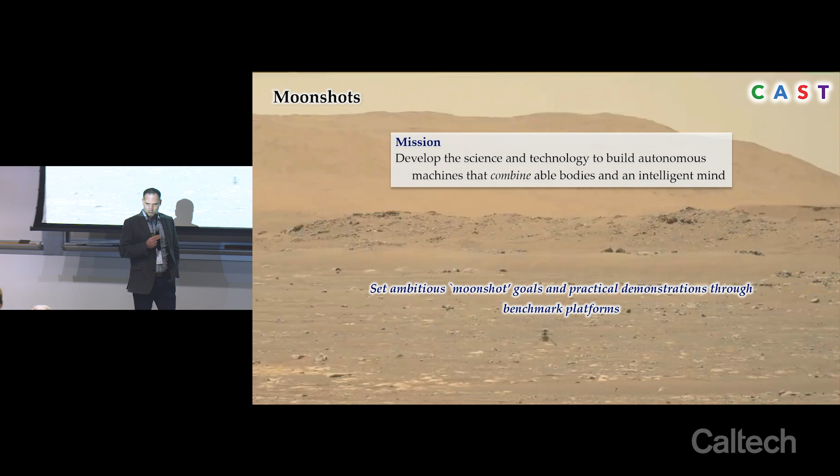So to kick off, I'm going to rehash a couple of Mory's slides just to connect back up again. The ultimate idea was to bring together bodies and minds and do this through ambitious moonshots. This is more of a Mars shot, which is the way I like to think about them now - let's get things on Mars as well as the moon, as JPL indicated earlier. But how do we set these kind of seemingly crazy goals and then push the science to actually make them a reality? As you saw earlier, CAST started with this collection of moonshots, and these have really stood the test of time over the last 6 years.

They represent all the different ways you can imagine robots interacting with people - through partners, through the environment, through things like explorers, but also the ways they can help us through things like guardians. Wildfires were mentioned earlier - how can we have robots that serve as guardians? And so we've developed in each of these moonshots over the years.

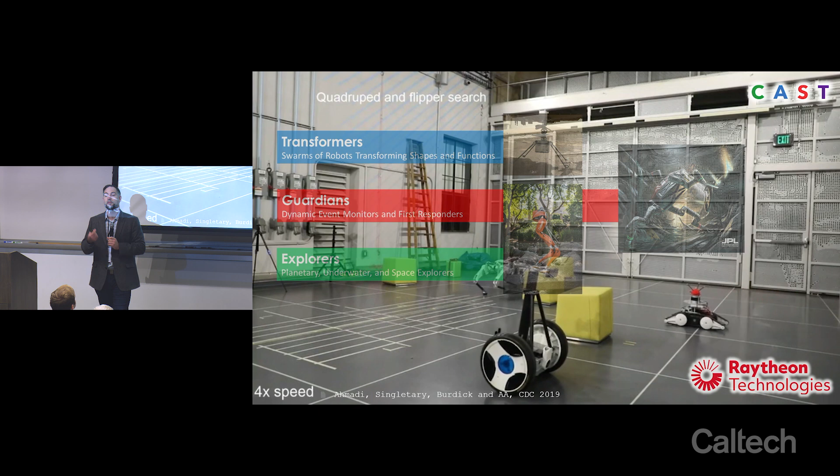But something interesting has happened recently, and I think this marks the next stage of CAST, which is it's not just the individual moonshots now, but we've started to think beyond the moonshots and how we can unify between multiple moonshots simultaneously, now that we have this sort of baseline capability. This was one example - with the Raytheon project, where we brought together these moonshots, if you'd like.

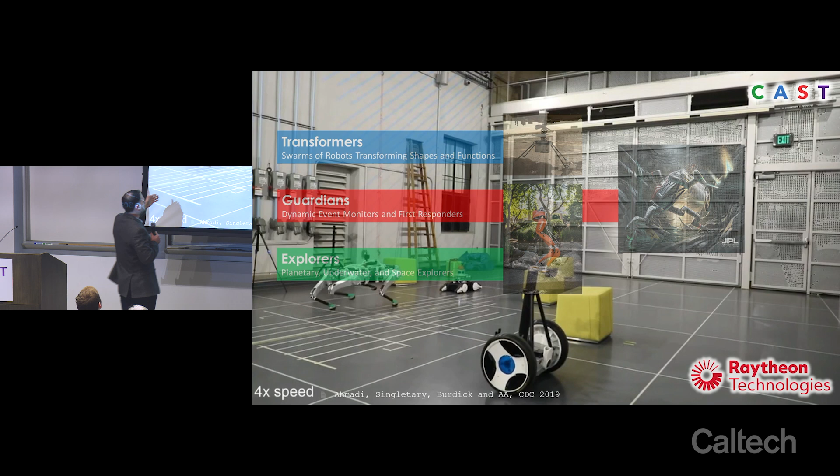So it's sort of transformers in the sense that we have multiple robots here with different locomotion modalities, and they're able to work together and coordinate autonomously to explore a space. So what you can do is utilize, if there's rough terrain, you can use the quadruped. If you need something a little bit rough, you have tracks, and then finally you have a wheeled vehicle that might have most of the equipment on it. So how do we pull those together in the transformer context to explore a new space?

And so this is this multimodal locomotion paradigm that JPL is thinking about for the moon right now. This is, when I talk about combining moonshots, I think a wonderful example. This is not my work, and Alireza will talk about this in this session. So I'm just highlighting really quick this idea of bringing together multiple moonshots.

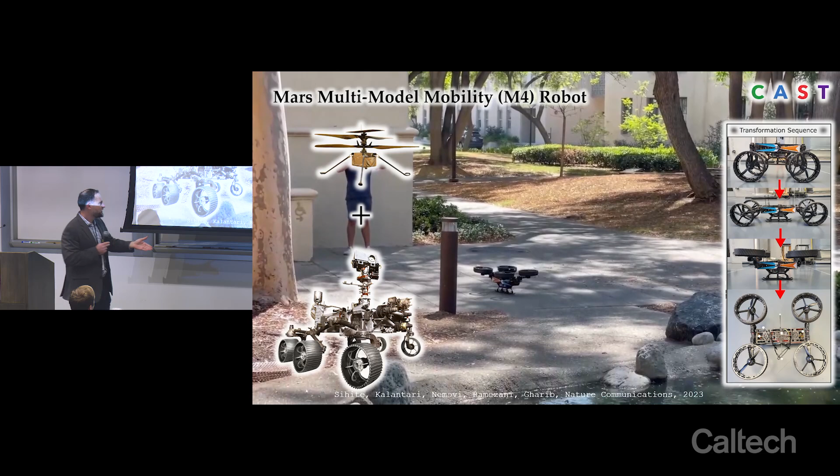In this case, you have a transformer, and it was directly motivated - this is not my work, but I heard it's directly motivated by thinking about combining the Mars helicopter with the Mars rover. Now you have a platform that can both fly and drive and transform between those modalities, so it can explore new and novel spaces by leveraging multiple modes of locomotion.

So this leads to where we're going next in my mind, which is how do we really bring together a bunch of different robots and fully leverage their capabilities? As an example, this is one of our more recent moonshots that we're just kicking off, and it's a result of TII.

We want to think about a robot that might be able to do more than just fly and drive, but also walk. Now these are just mock-ups, an illustration of what this robot might look like, but these are more than just mock-ups—we've started to work on different components of this. The moonshot here is: how do we do this? Just at a basic level, what is the mechanical design needed?

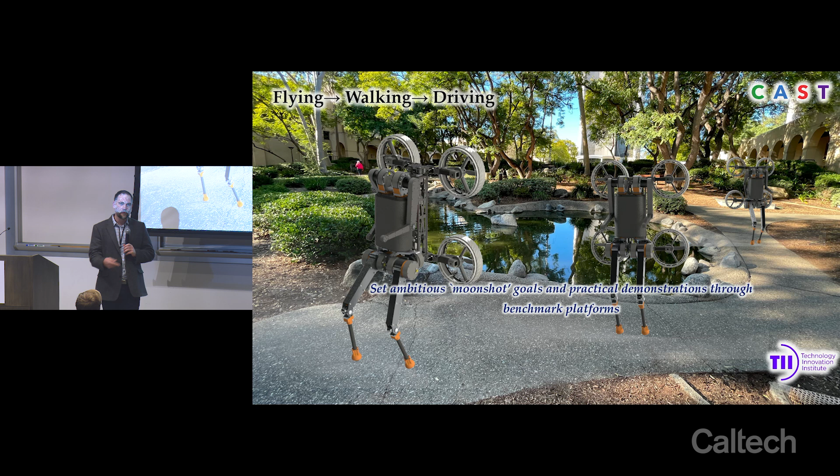But the design itself is one thing—we really need to couple that mechanical design with the software under the hood. If we're going to achieve different modes of locomotion, we're going to need to leverage an autonomy stack really, really deeply. So this talk now is going to talk a little bit about what it means to leverage autonomy stacks.

I have to say, as a sidebar, this is I think the paradigm shift I've had since I've been a part of CAST. When I got here to Caltech, I did nonlinear control on robots, and I had what I would call a very flat worldview. I thought everything would be a set of equations, and then you do your algorithms, you put it on the robot. What I've really come to appreciate is that autonomy requires this three-dimensional viewpoint of the world.

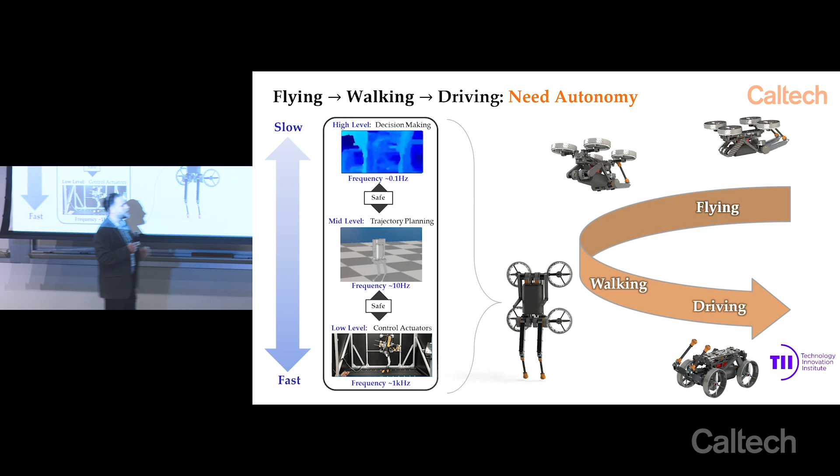That is, you have to understand that any autonomous system is going to leverage different algorithms at different layers, at different time scales, and those need to communicate across those time scales. That's the only way you can really get the full potential out of these robots. So I'm going to explain what this means, how we've leveraged it recently, and more importantly, how we use it on things like dynamic robots to achieve diverse behaviors.

So a simple example—and this is actually not simple, this was the state of the art just a year or two ago—how do we look at autonomy just on a walking robot? I won't go through all the details, but just this one mode of locomotion out of the three I talked about earlier itself has its own autonomy stack.

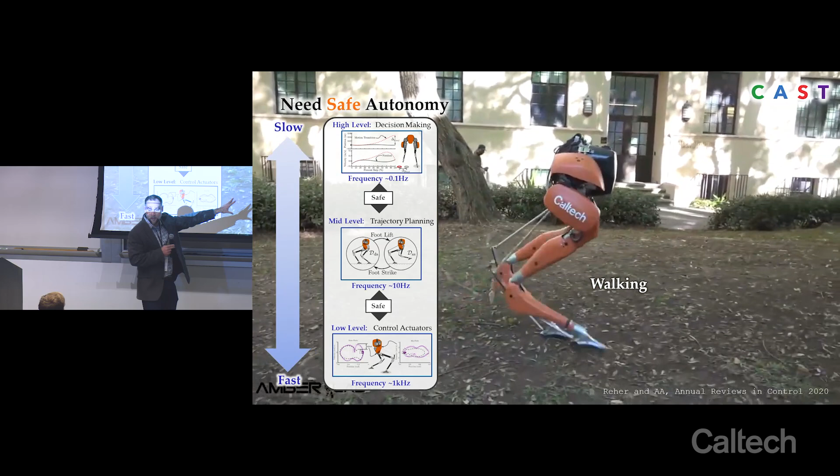Autonomous systems have layers upon layers, right? In this stack, to do things that this robot's doing right here, you have to do everything like decision making—where is the robot going to go? You have to plan its trajectories, that's its walking gait, that's like your spinal cord, your central pattern generators.

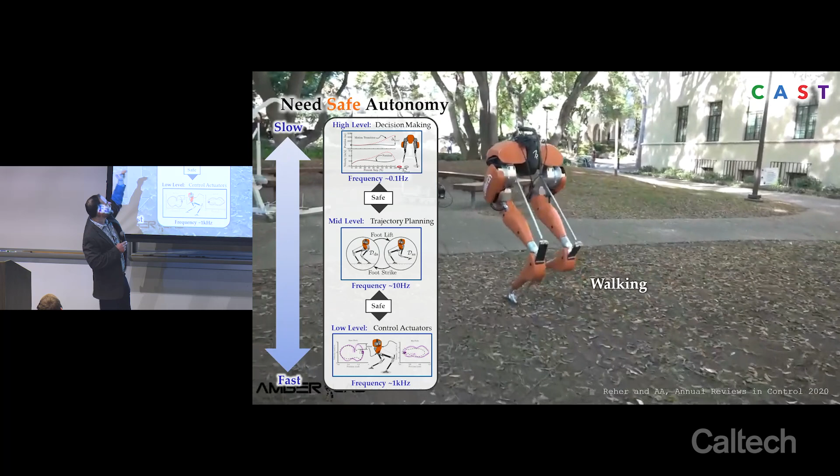And finally, you have to react in real time to disturbances in the environment that you didn't model or sense. Right now, it's going to go over this root system that it didn't know was there, and it dynamically will react to it. So when you see this type of robust autonomous behavior, it's not a function of one algorithm at one layer—it's a function of taking all of these algorithms holistically together and understanding their interplay.

That's what has to be developed for any system to truly be autonomous—layers upon layers of algorithms. More importantly, at a scientific level, we have to understand how we can pull those layers together. So that's when the computer stops, which is always fun. All right, so what does this mean?

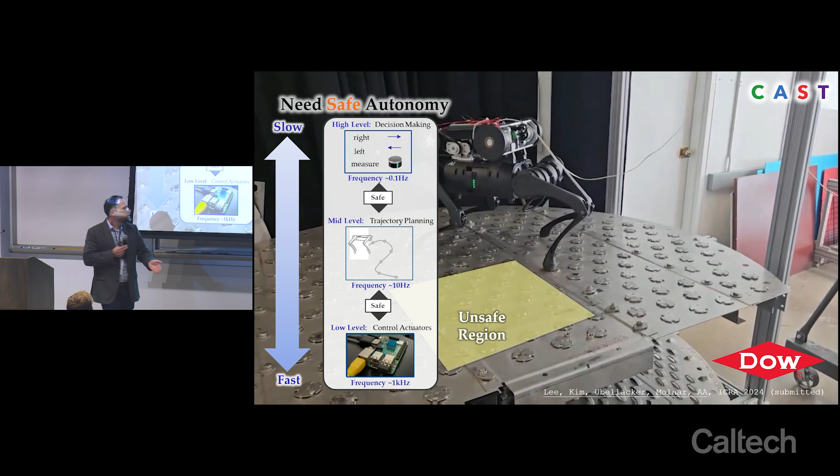Well, as soon as you start having all of these layers in an autonomy stack, safety starts to become critical. Safety is always critical in autonomous systems, but certifying safety becomes ever more complicated, right? Because you might have heuristics for safety at one level or another—if something bad happens, you stop an actuator here, if something bad happens, you do this.

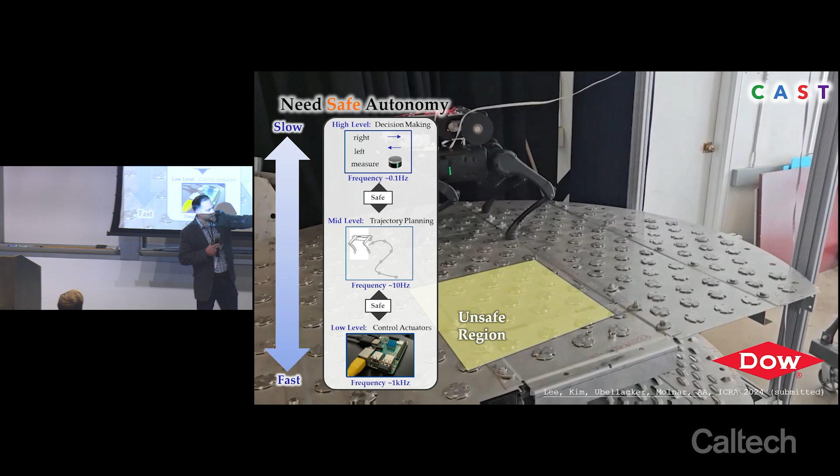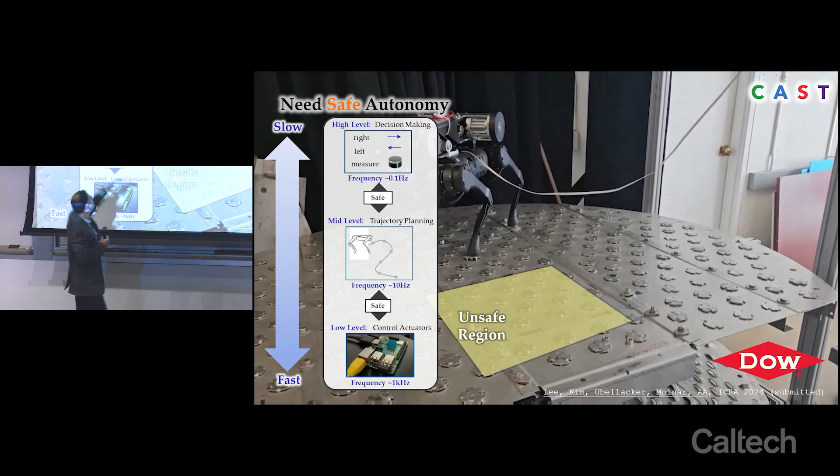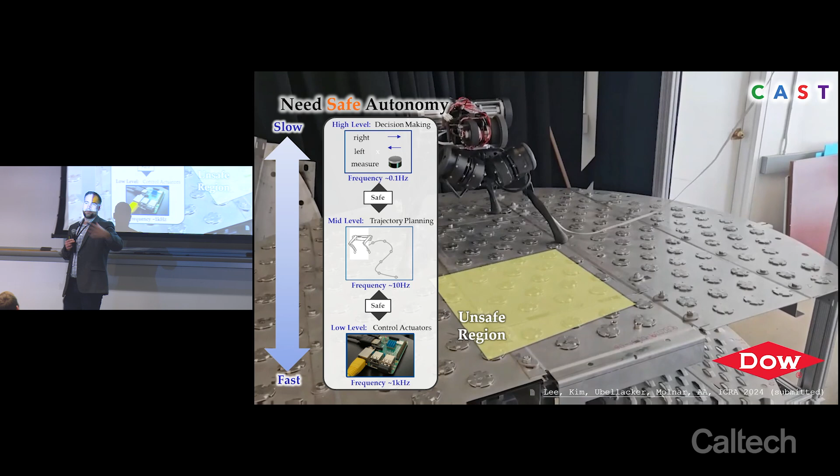But if we want to do something like—this is actually based on a Dow project with CAST, where we're in these distillation column trays, where you mix chemicals—you might have regions where you can't go with the robot. How do you, with this complicated autonomy stack, and this robot's very complicated, we'll talk about this session a little bit more, need to avoid maybe a bad region? How do we understand what that means in the context of these layered autonomy algorithms?

And so that gets to this notion of safety. This has been sort of the central theme of my lab, which is: how do we guarantee safety on autonomous systems?

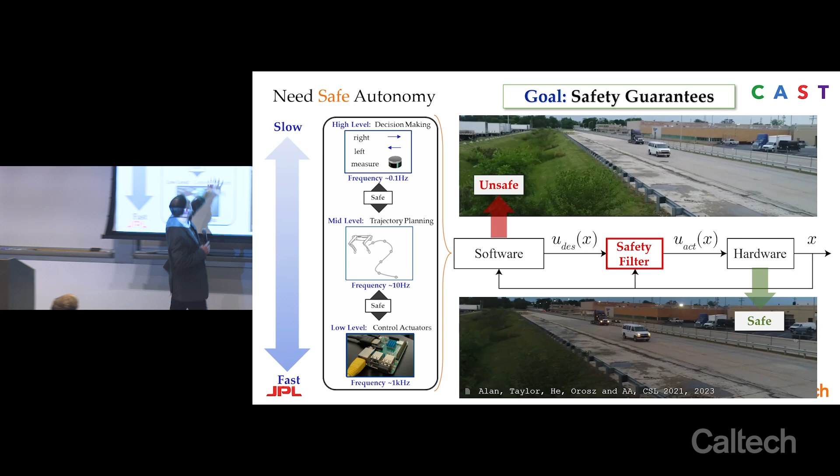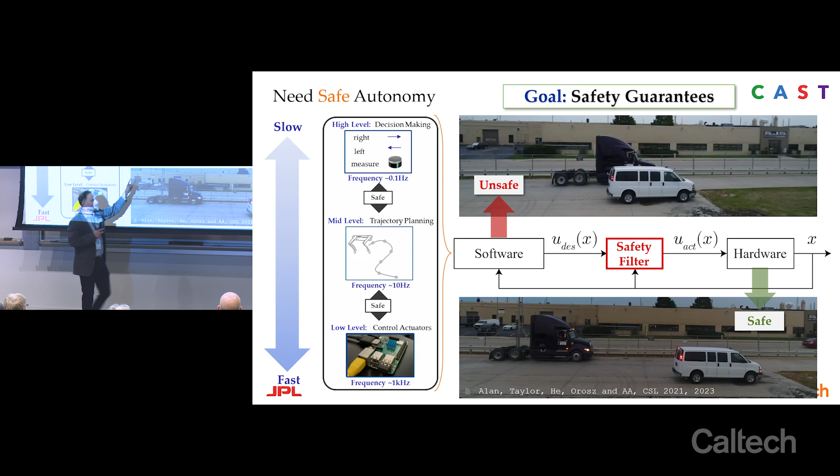All this gets clumped up, edge cases happen, and failures occur. So the basic premise is what we need to do is take whatever was dealing in this software - we can't certify all of it, it's too complicated. We can't go into the truck and find out where their algorithm failed. We could, but it takes a lot of effort. Rather, after they run their software, we're going to do our software at a final stage before we put things on the actual hardware. We're going to filter whatever they're doing to make sure that safety is always satisfied.

That gives us a guiding light, a guiding principle. Things never work in practice like the math dictates, but the math tells you what to do at a macro level, and more importantly, what signals to look at and what values to look at. We can use that to guide the generation of this filter.

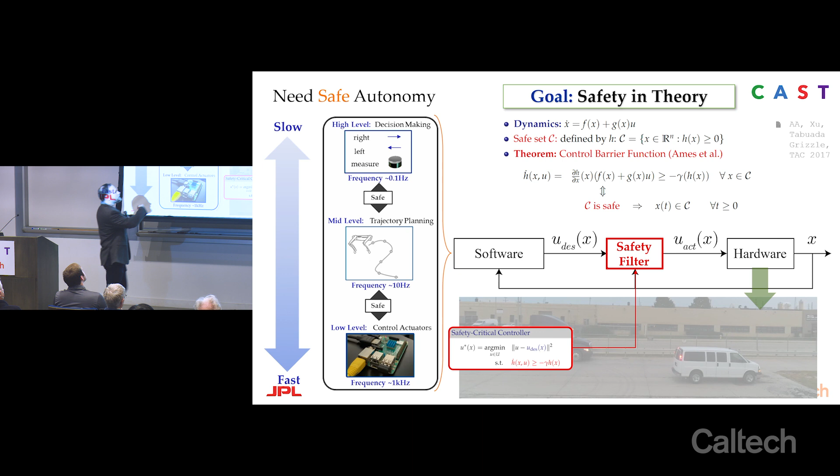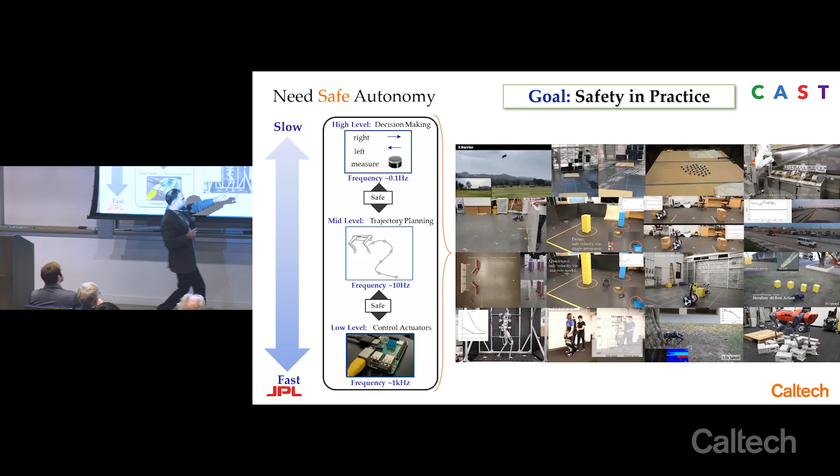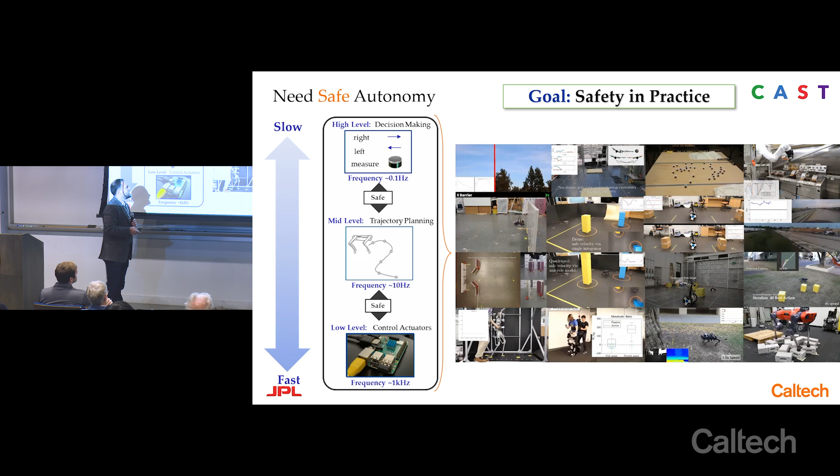In order to successfully do this, we can't be complacent. We need to put it on lots of hardware to check the math as rigorously as possible, both theoretically and in practice. So these are just some of the robots we put this on through the 6 years CAST has existed - just a subset of some of the videos, some of which you've seen earlier, including things like exoskeletons and walking robots. The more we put this on autonomous systems, the more we can understand where the failures might be, where we might not have thought of certain conditions that happen, and guarantee safety in a more seamless fashion.

Let me show an example of this with AeroVironment. This was a CAST project from 3-4 years ago now. This is just to give you an idea of what this safety filter looks like in action. In this case, the safe set is: don't hit obstacles in the environment. You have a drone here with onboard sensing, onboard computation, and a camera, so it's sensing the environment.

The pilot tries to drive the drone right through this obstacle, as if he didn't know the obstacle was there. This safety filter prevents the drone from going through the obstacle, and as soon as the obstacle is removed, the safety filter lets the pilot do what he wants.

So at a macro level, this is what we want to do on all the systems. You can do this in more complicated obstacle environments - in this case, we have again more obstacles. The same thing applies, and importantly, what this gives is a certification of safety.

This plot here is telling us whether we're safe or not, and as long as this plot is positive, as long as these values are always positive, we know we were safe, so we have a certification - I should say, despite what's happening under the surface. This drone was actually running complex algorithms developed by AeroVironment, really good algorithms, but we could do this on top of their algorithms.

We also can take this out into the field. So this is now a high-speed drone, and here it's actually being dropped, meaning the pilot turns off all of the control signals, and we have a safety filter that prevents it from going to the ground.

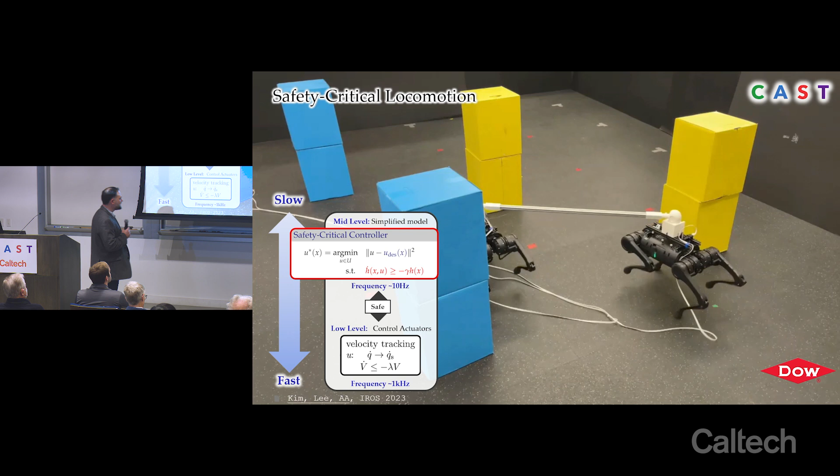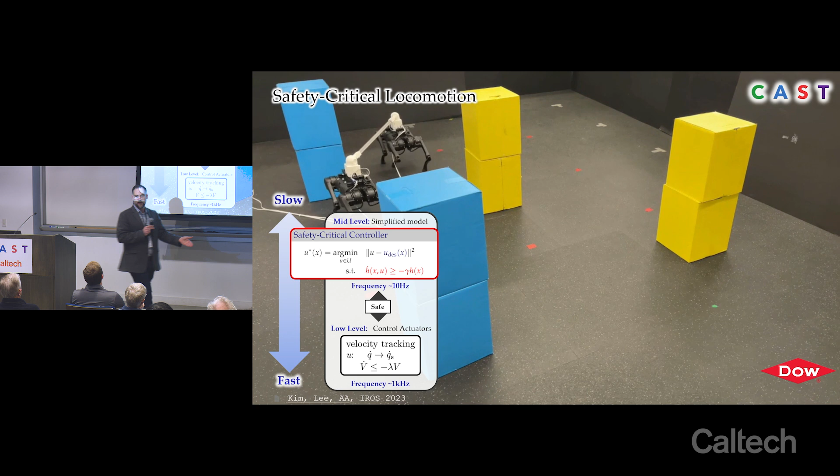So this is the transition to practice. How do we do this on these complicated systems? I mentioned the autonomy stack, and so far I haven't really talked about it. The way the autonomy stack works is it's not just something you might want to filter on the back end, but it's something you can actively exploit to make safety guarantees on the system without necessarily understanding what's below the hood. This was the paradigm shift for me. As a control theorist, I always wanted to know the full dynamics of the system, but with complicated autonomous systems, you just won't know.

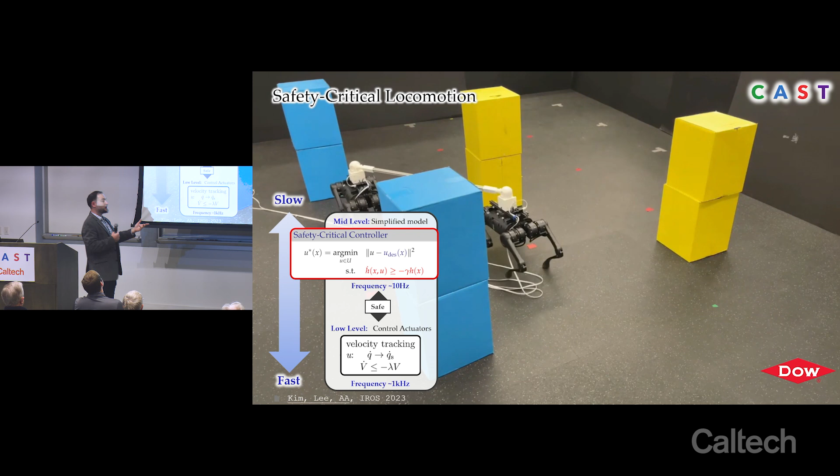So in this case, we have two quadruped robots, run by walking algorithms developed in my lab, but these are very complicated walking algorithms. In addition, we pin the robots together, which makes it even more complicated. And what we say is, on top of all of that, we want to ensure safety, and the way we do that is with this safety filter idea to avoid these obstacles.

So how do we do this on these complicated systems? We can leverage the autonomy stack. At a basic level, think about when you're joysticking a drone, or just driving your car. When you're interacting with your car, you're turning the wheel and hitting a couple pedals—that's the only interaction you have with it. You don't understand the dynamics of the car, you don't know that a control algorithm is running at the engine level to regulate speed. You're able to successfully avoid obstacles in the environment, hopefully most of the time.

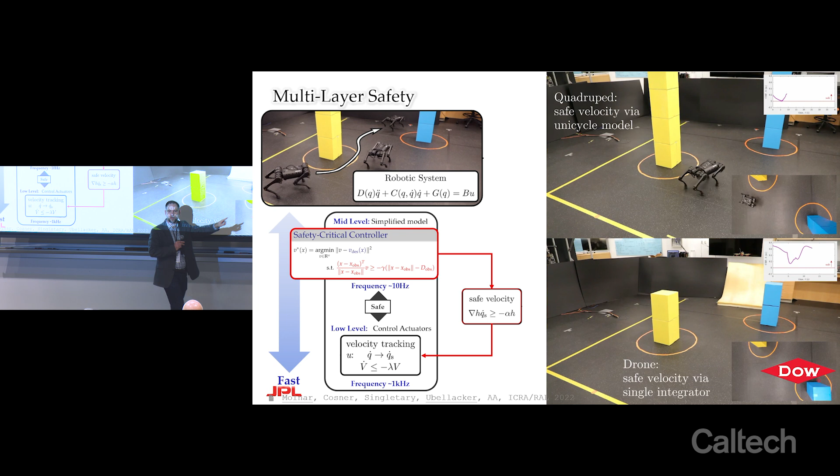This same idea we can do mathematically now. We can modulate the reference signals going into the system. In this case, we have the exact same safety filter running on a drone and on a quadruped. All we're doing is modulating the reference signals, the desired signals going in, with these safety filters, and we can mathematically guarantee safety even though we don't know what's happening below the hood. This is the basic premise we're building on to get to much more complicated autonomous systems in practice.

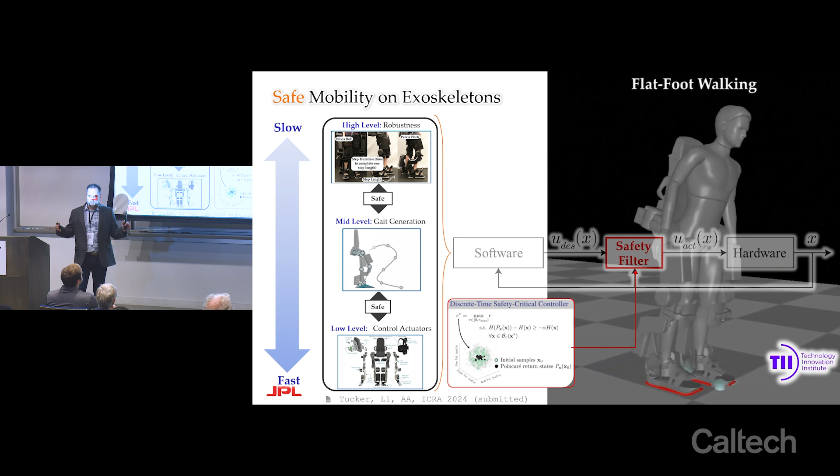So again, we're able to leverage the autonomy stack and ensure safety. And this leveraging allows us to extend it to a variety of different application domains.

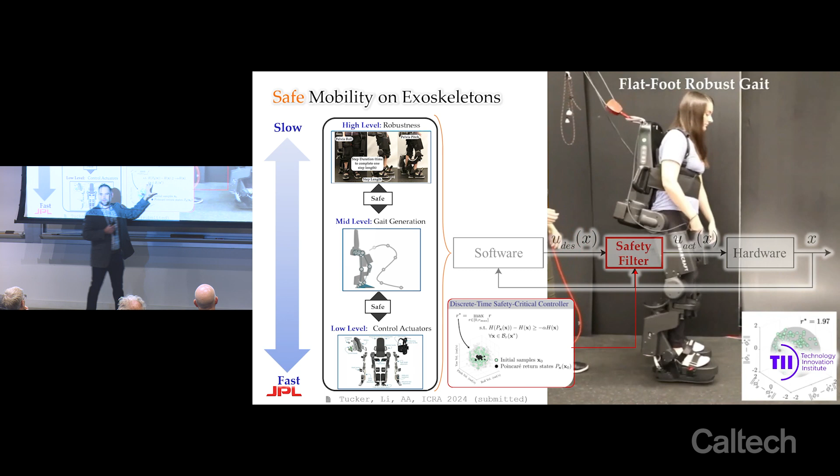So as a recent application, we applied this same idea that you saw with the drone to an exoskeleton. This is a lower body exoskeleton, and it's able to walk dynamically, even with these multi-contact behaviors, through this safety filter idea.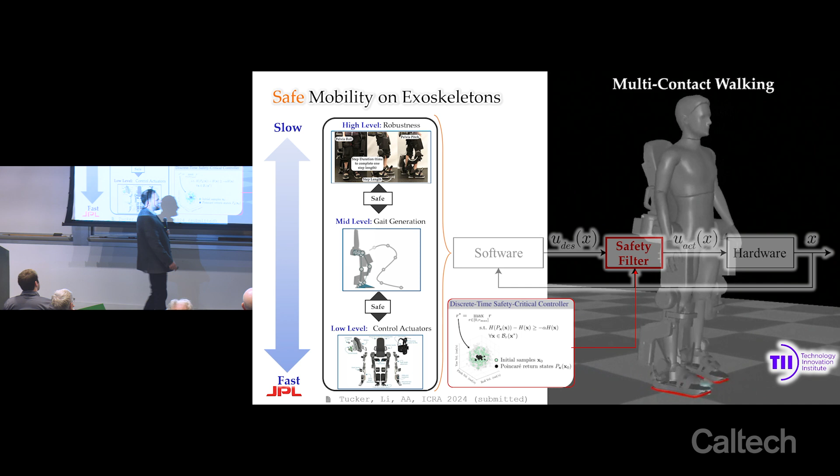So this gets to the last bit, where are we going next? I'm really excited, all throughout this presentation I indicated the sponsors, and we have a lot of exciting projects happening, but one I'm especially excited about is we're starting to think about how this safety filter idea can be leveraged in the context of building robots, not just controlling robots.

So we want to really take this to a next level.

So what we can do is view software, that is our ability to generate walking gaits, as the nominal. And then we can use co-design as our safety filter, meaning we design around this software to ensure optimal and safe behavior on the actual hardware that we instantiate.

So we can create a feedback loop such that we can modulate the mechanical design and get optimal designs out that are also guaranteed to satisfy the properties we care about.

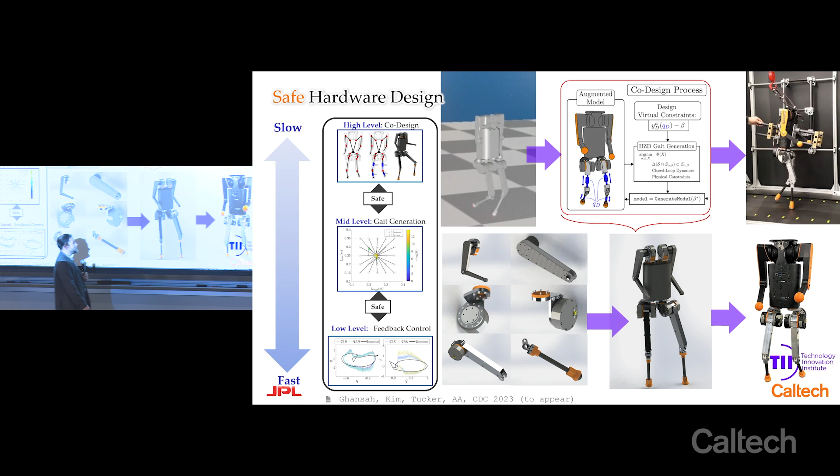And we did this on this robot. So this is the final result of this algorithm, and this is the physical robot that we built to instantiate those ideas. And we can test this out now in practice.

So this is actually the first walking on the Caltech humanoid robot, the Caltech CAST humanoid robot. And it's able to dynamically walk, dynamically balance itself, and importantly, it was designed with this optimal purpose in mind, of walking safely.

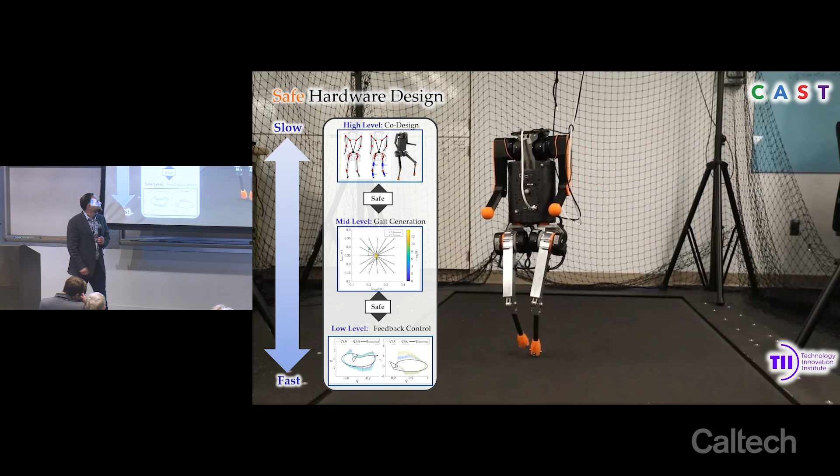I want to just watch it for a second, because I'm always excited when there's a new robot walking.

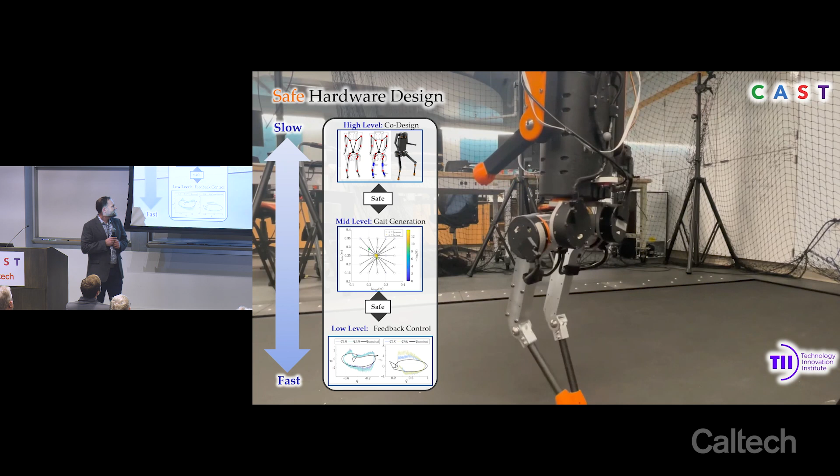And again, these are just the first steps taken by this robot, and this is all very recent. But our ability to go from a design to a dynamic realization on the back end is very exciting.

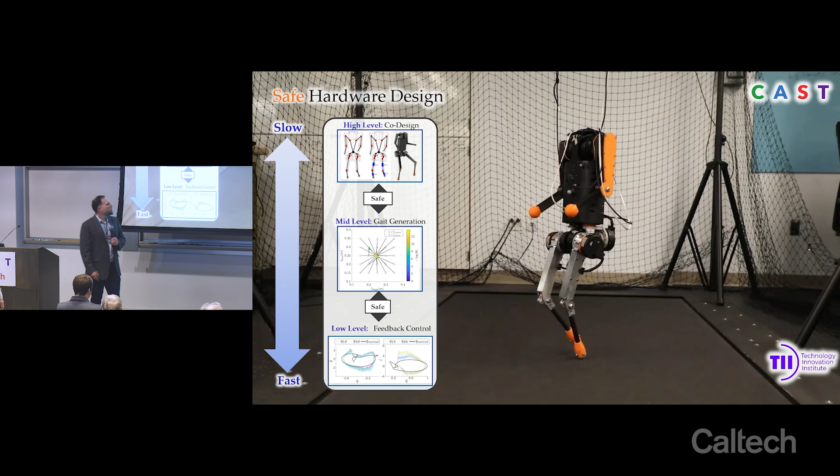And as I mentioned earlier, we want to bring this together. This is step one of many steps, no pun intended, to building even more capable robots able to do even more. So earlier on, I told you about this idea of having a flying, walking, driving robot.

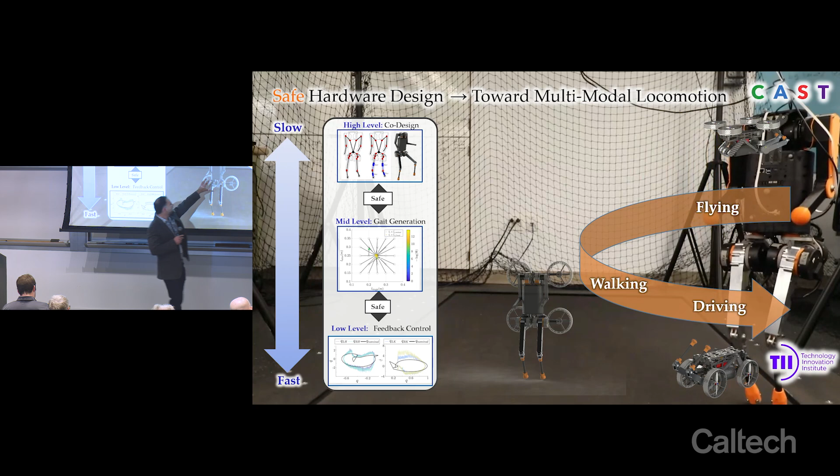And in this case, this is the walking bit that we're starting to develop. The flying bit you already saw with M4. And so we're at a point now where we can start to think about combining these different capabilities together.

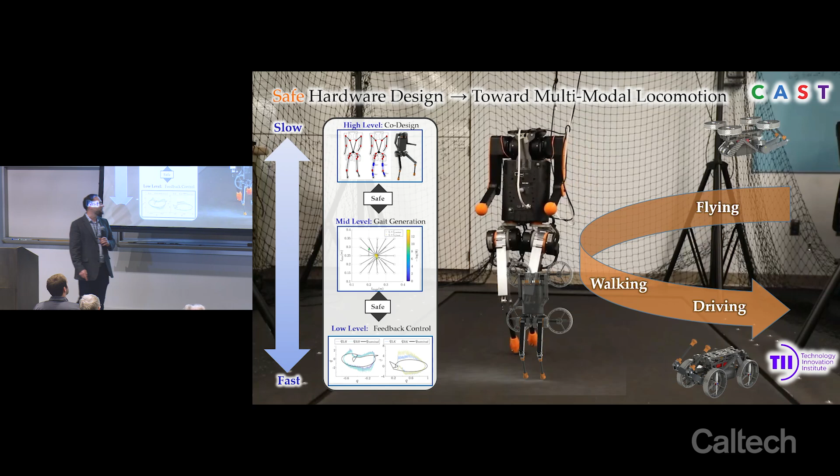So that's where we're at, where we've been, some of the achievements we've had, and you're going to hear more details throughout the day. But more exciting, I think, is really where we're going, what's on the horizon.

Again, the ability to leverage autonomy stacks, to think about guaranteeing safe behavior in the process, to develop new hardware platforms and then bring those platforms out into the real world to do really fun and dynamic things. So there's an exciting future on the horizon for CAST, and with that, thank you very much for listening.

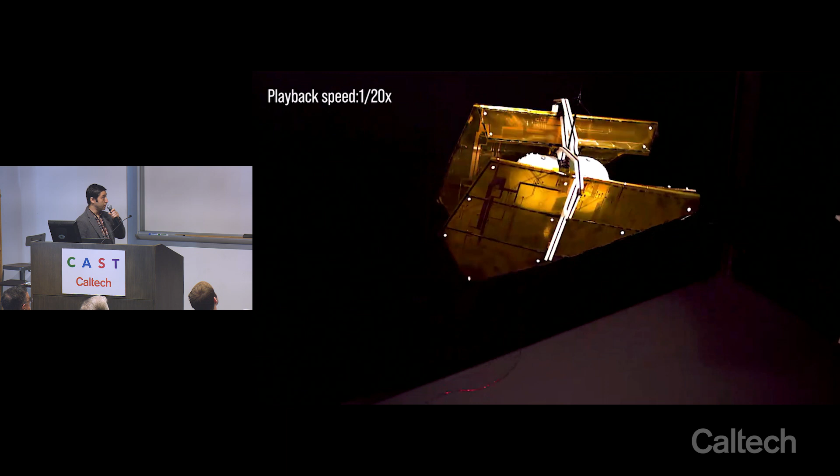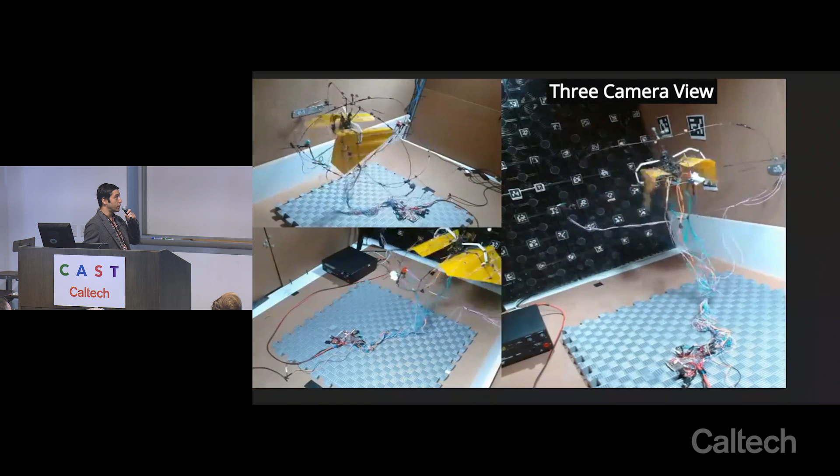So this has greatly influenced my research, and that has led to quite a bit of bio-inspired designs within my team. We have created drones that look like bats. They can dynamically morph their body structure, and they can produce thrust to weight ratio that is enough to carry a camera, a powerful computer, while avoiding producing powerful and continuous air jets, which enables them to fly inside extremely confined spaces, channels, HVAC channels as small as 2 by 2 square feet in cross section.

So we are interested to use these machines for remote sensing in future. We also create custom designed dynamic walkers with literally a jetpack attached to the torso to further delve into the concept of posture manipulation and thrust vectoring in the context of legged and terrestrial locomotion, with application to locomotion over steep slopes, inspired by birds' wing-assisted incline walking and running.

I'm going to briefly talk about it when I give you an update on M4. We also look into locomotion systems with manifold moving joints and contacts to enable traversal over rough terrain and aggressive environments. These are high-dimensional problems, and classical methods fail, or they are not efficient. We use ML-guided control techniques.

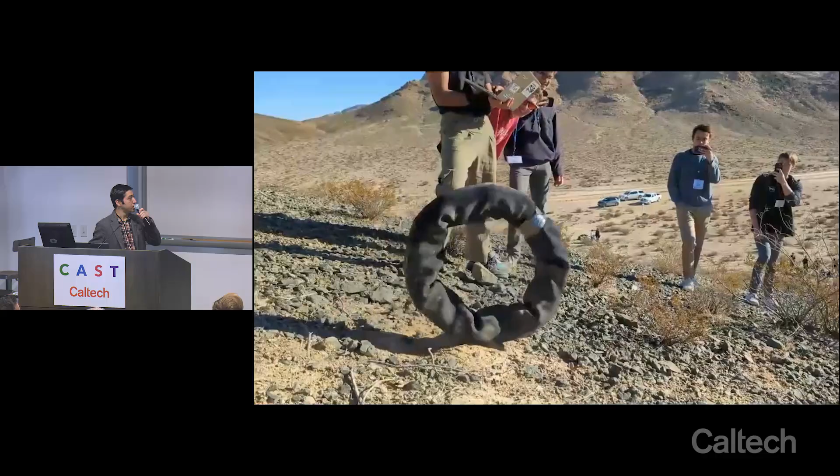Here, the goal and the objective is to really operate in environments where classical standard mobile robots such as wheeled systems or legged systems face the risk of complete immobilization. So this is briefly speaking what I do when it comes to designing morphing systems.

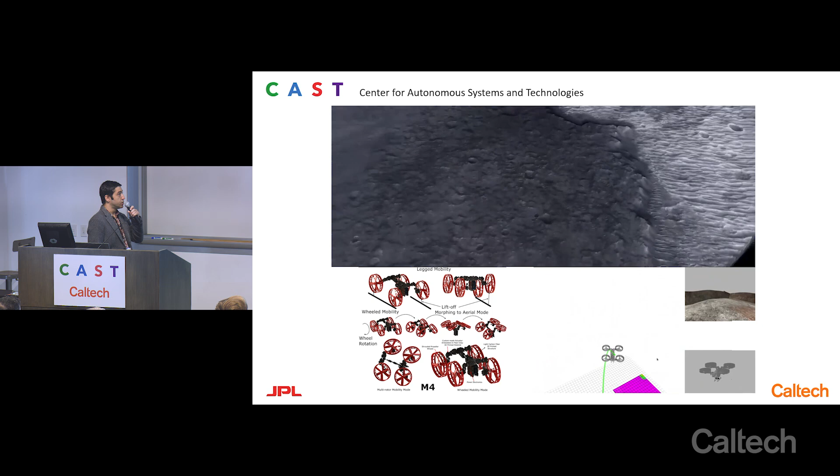Then M4. In 2021, I started collaborating with CAST and JPL, and that was sort of the time that the idea of M4 was conceived with Mory and myself. Basically, the whole idea of posture manipulation and thrust vectoring is pursued in M4's design.

However, we have a different objective here. The objective is to significantly enhance locomotion plasticity. By that, I specifically mean that we want a single platform to showcase many different modes of operation. So that's the whole idea here.

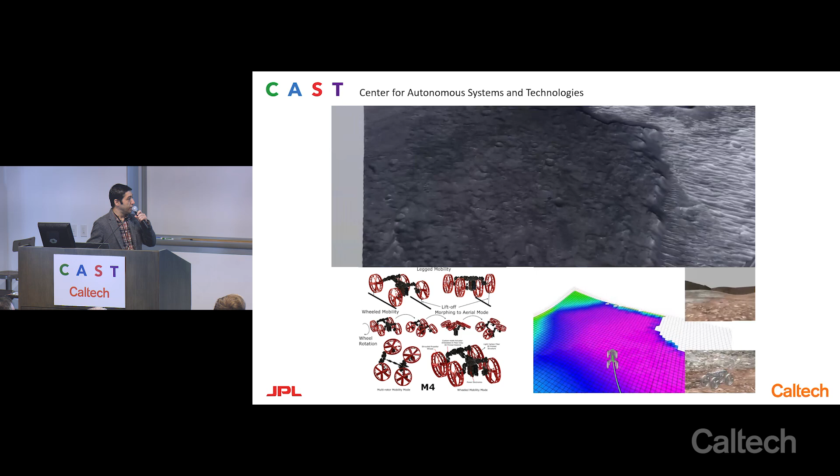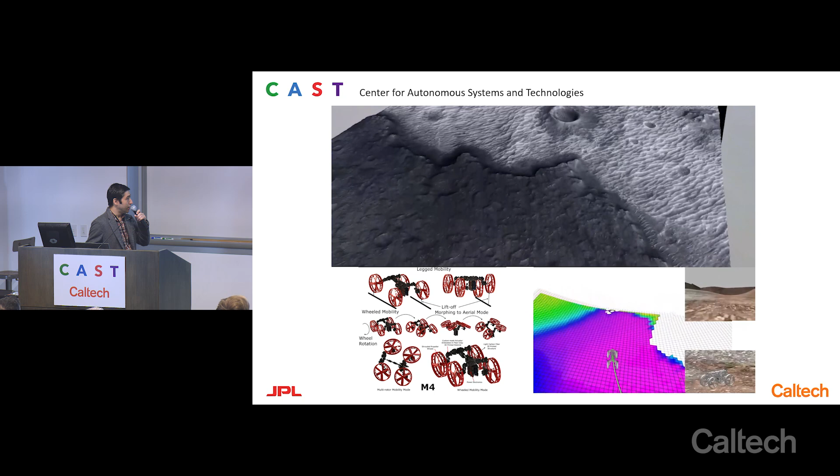This project, as I said, started 2021 under Mory's leadership and with funding from Jet Propulsion Lab. Mory, myself, and JPL's Arash Kalantari aspire to use M4 for Mars explorations one day. We are working hard to that goal. I'll give you a brief update in that regard soon.

There are several unorthodox designs in the past years trying to integrate posture manipulation and thrust vectoring to create multimodal machines. How is M4 different from these solutions? If you inspect these multimodal systems that are out there in the literature, they cannot showcase more than 2-3 modes of operation.

Those of us who do design know that when the modes of operation increase, each mode introduces its own conflicting requirements, and accommodating all these conflicting requirements is not a trivial task. So in M4's design, we took the following design philosophy: we considered multi-purpose appendages and attached them to a morphing structure. With this, we try to extract different functions from the appendages, and with the morphing body, realign the system to maximize performance.

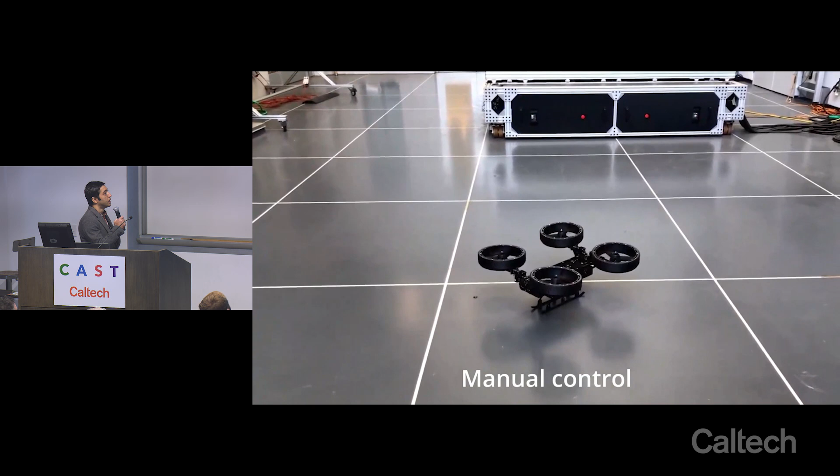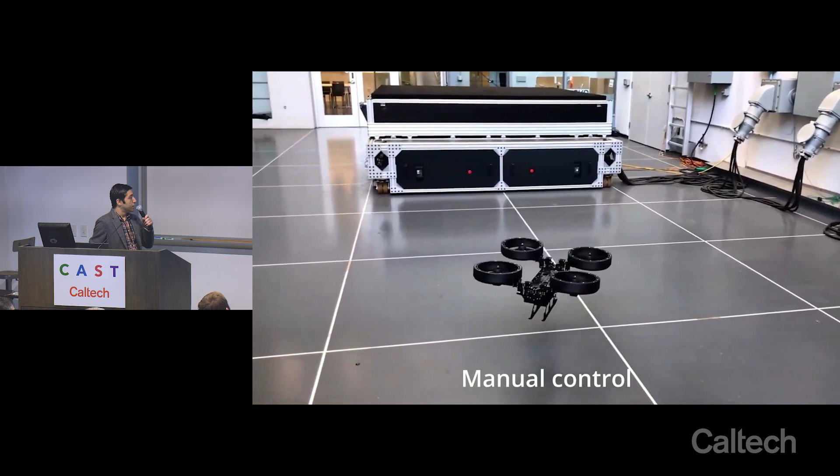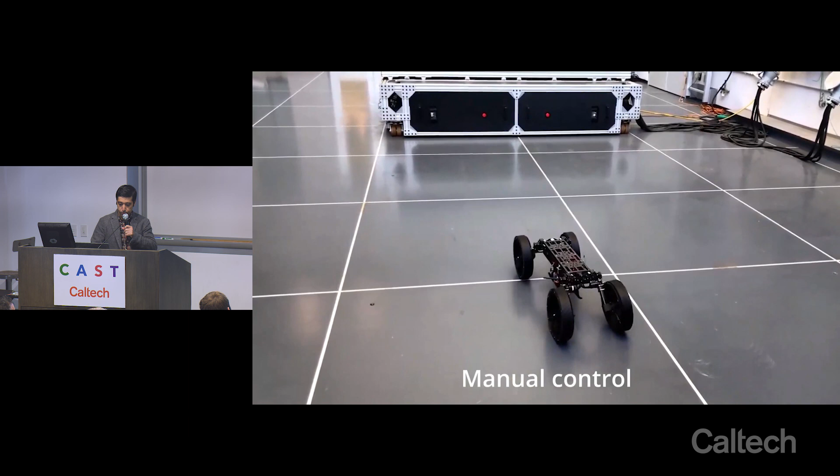So this is UGV to UAS transition, where the appendages are repurposed from wheels to thrusters, and we have a smooth transition here. And making a transition from UAS to UGV, that's what's happening next. This is an almost instantaneous transition that makes M4 very suitable for multi-phase scenarios when we want to make quick transitions between different modes of operation.

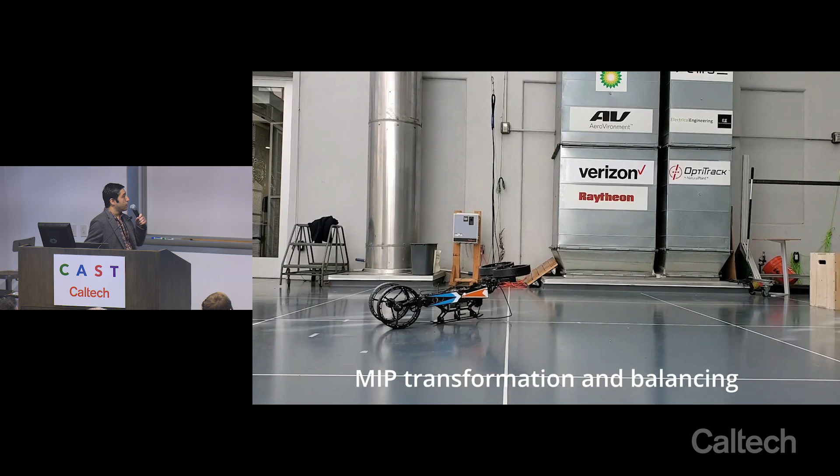This is mobile inverted pendulum mode. The front appendages are repurposed to thrusters to lift the vehicle, while the rear appendages are locked to balance the system and go into mobile inverted pendulum mode. This is also good for scouting, if you want to increase perception performance from a high vantage point.

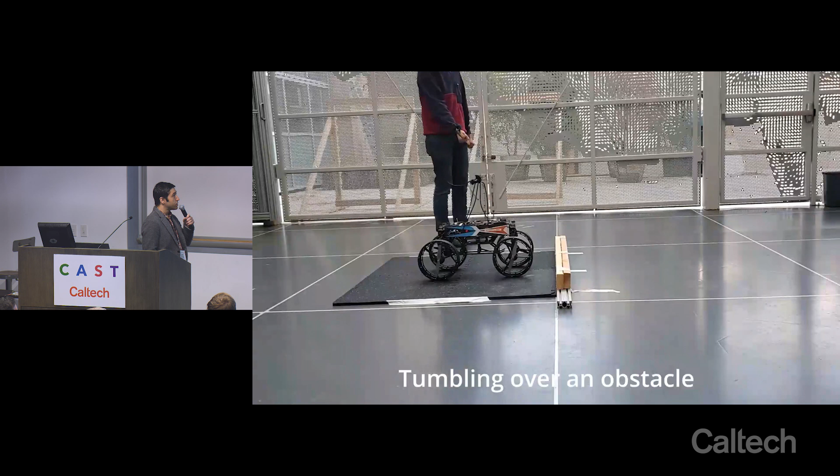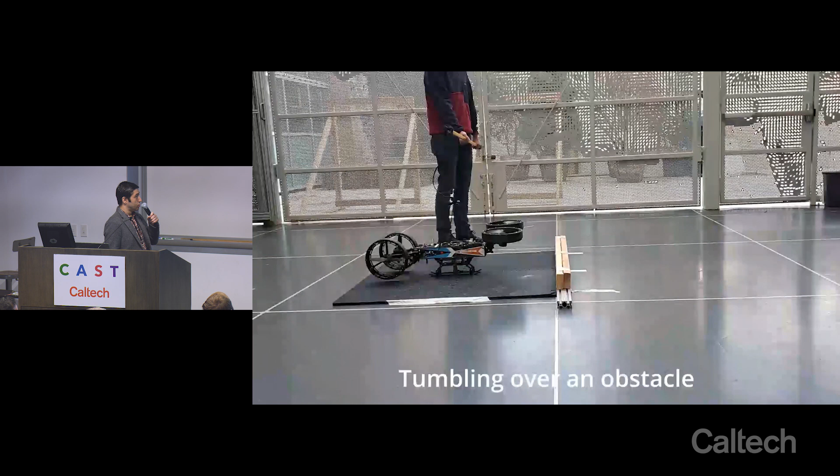We also looked at the MIP maneuver to go over obstacles that cannot be managed with wheels. The front appendage is repurposed to thrusters, realigned to maximize performance, and the rear appendages push the vehicle towards the obstacle. It's going to happen in a few seconds. Once the obstacle is cleared, the system goes back to UGV mode and continues the mission.

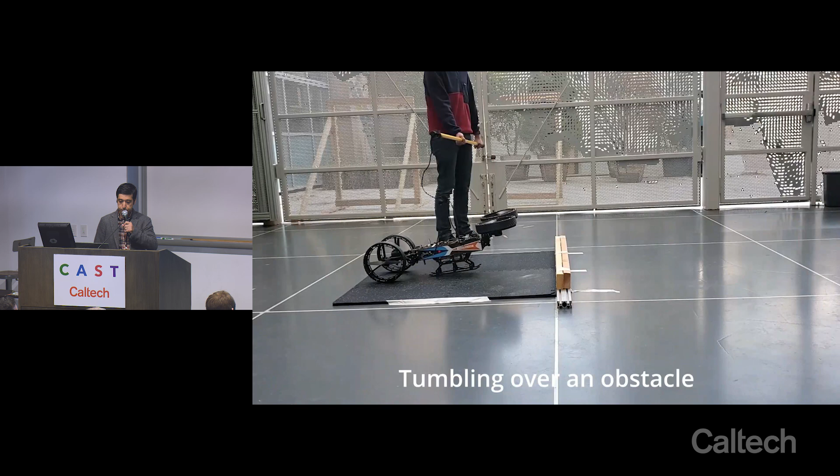As you can see, this is a very interesting combinatorial problem. Depending on what functions you want to extract from the appendages and how you realign them, you can get different modes of operation. And this is clearing the obstacle and going back to UGV mode, continuing the mission.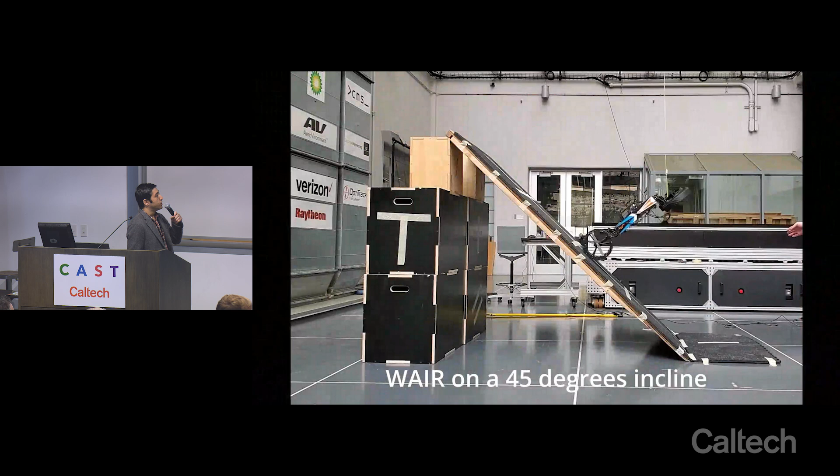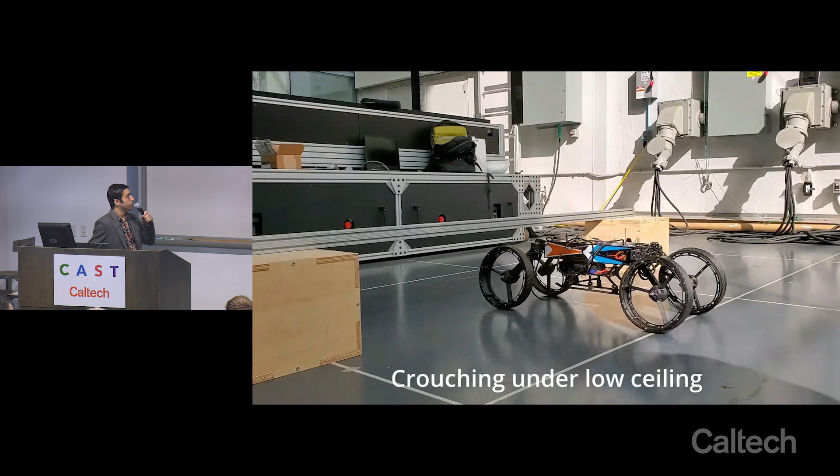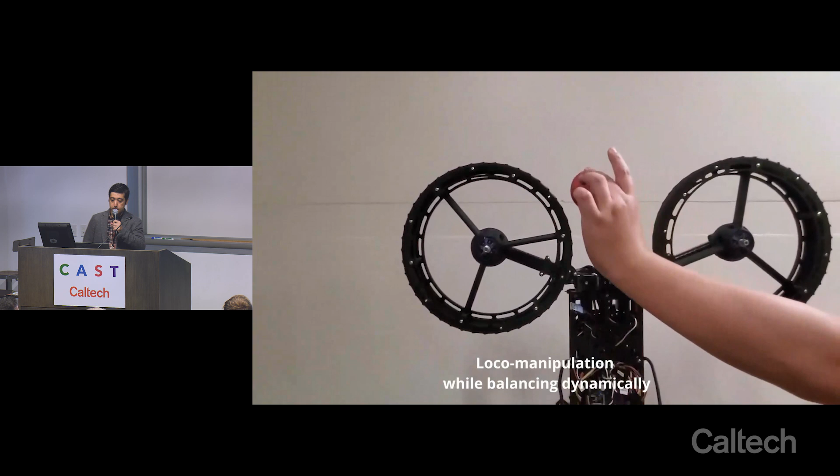As you can see, M4 can showcase different modes of operation. This is a very interesting combinatorial problem, and there are so many other operations we have not yet explored but are interested to explore. This is certainly a very exciting aspect of the M4 project - the number of modes of operation we can get from M4. But in my opinion, the other exciting research avenue here is autonomy.

M4 can multifold its thrust-to-weight ratio without any added mass, and that gives us surplus payload capacity to carry powerful computers for autonomy. This is another interesting aspect of the M4 project here.

So this is a facet that has been initiated. We are striving to take M4 outside CAST and participate in real-world operations. For more updates on this, please stay tuned, visit the CAST website, and thank you very much.

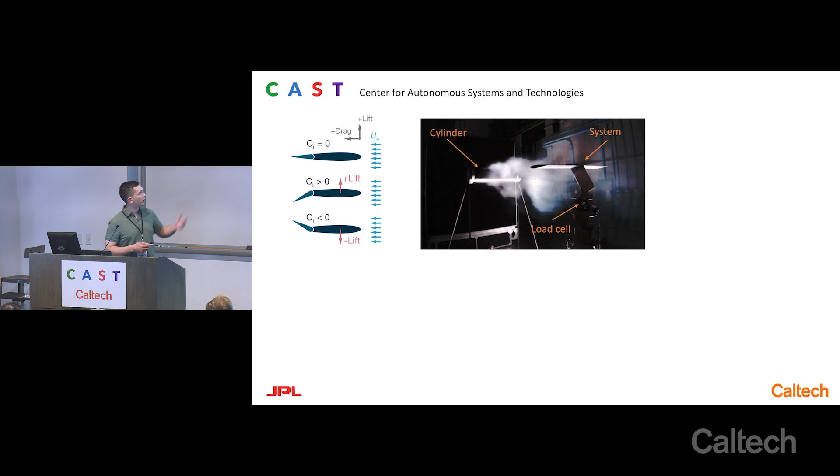Here we have it in our cast wind tunnel, and you can see there's a lot of turbulence. We also integrate flow sensors, because like we were talking about, this is the sort of information that biological flyers use to make advanced control decisions to maintain stability in really turbulent environments.

The actual experiments we're going to see here were performed in the Lucas wind tunnel. Instead of the symmetric cylinder we saw up top, we actually used an asymmetric bluff body, which was dynamically mounted on bungee cords, so there was a lot of different frequency content.

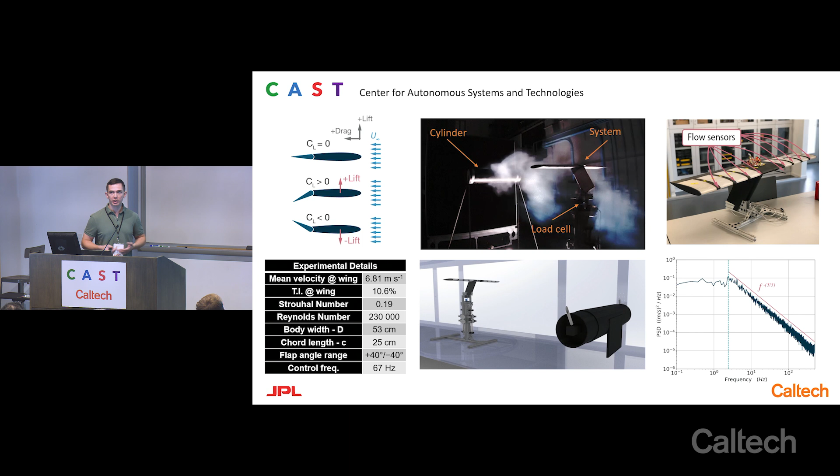So now I'm going to introduce our solution on the algorithmic side, which is the FALCON algorithm. The FALCON algorithm has two parts. First is a warm-up, where we take just a little bit of data to build a basis in frequency space on which we'll actually learn the flow and dynamics of the system.

The clever part of this is instead of trying to model it through brute force with a neural network or something, we're basically performing least squares on a Fourier basis. So we're taking a very nonlinear phenomenon, using a nonlinear transformation, and then modeling it linearly. We use lasso regularization while performing this to create a sparse basis of frequencies.

We run this again and again, and this allows us to use pretty much a plug-and-play controller, a cross-entropy method, to make our predictions and actual control decisions, and we're able to update our Fourier basis pretty quickly.

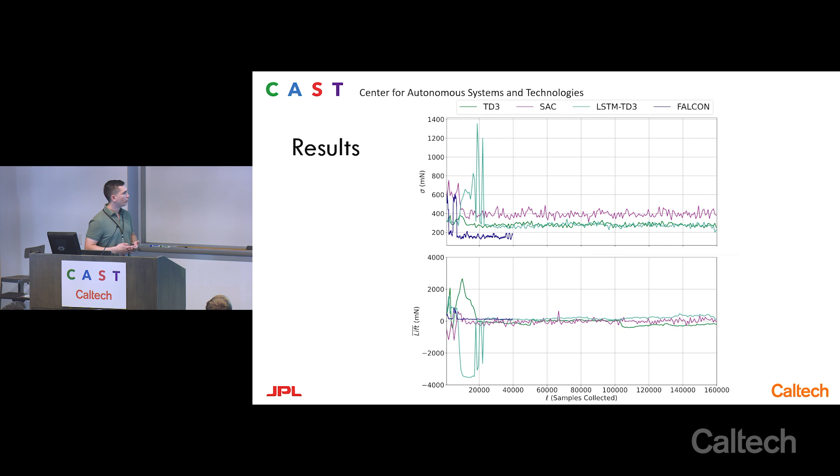Next, we're looking to push this project forward with a new generation of students and postdocs, and we're trying to bring it into the real world with 3D flight. We're trying different methods at the moment for platforms we can use so we can actually fly in the wind tunnel, which is challenging even with expert pilots and no learning.

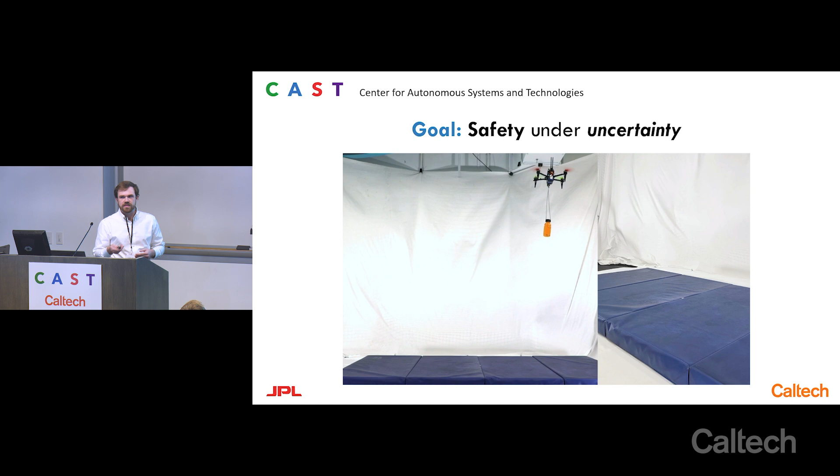We've actually seen a video of this experiment already, but what we have is a quad-rotor drone where we want to enforce some safety constraint.

So this is basically the floor, and we want to keep the drone from hitting it. But what we've done is tied this unmodeled disturbance to the drone - this is a bottle that weighs about half the weight of the drone. We're not giving the drone any information about the payload, so it has no knowledge of where the payload is or that it's even attached. All it knows is its own dynamics.

If you run a standard safe controller, you can see in this crash video the leg actually breaks off on the bottom. When you have a huge unmodeled disturbance like this, your safe controller is going to fail.

So the question we asked with this project is: how can we guarantee safety even when we have uncertainty about our dynamics? The approach we took is two steps.

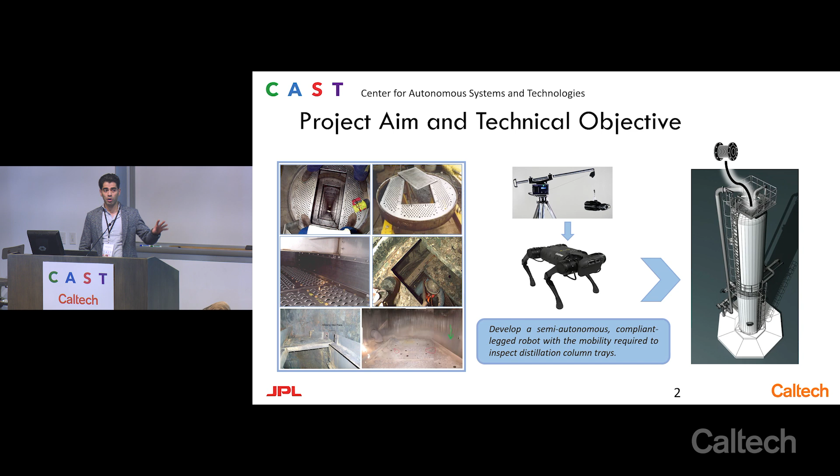Distillation towers need periodic inspection to check for any signs of damage inside, but this is a very dangerous and tedious task for human operators. Our goal has been to replace this with a robotic system to be sent inside the tower to do the inspection semi-autonomously.

The concept of operation would be that we have an operator station outside of the tower where the robot is set up and deployed inside, connected to the operator station through a tether system, and then go inspect all of the trays inside the tower by a map or waypoints that the operator introduces to the system. Once inspection on a tray is completed, the data is sent back to the operator, and once confirmation is given to the robot, it can proceed to the next tray. This process is iterated until all of the inspection is completed and the robot is retrieved from the tower.

There have been different pieces to this project, from mechanical system and mobility to motion planning and control, perception system and navigation, tether system and user interface, that our teams at JPL and Caltech have been working very closely on to make this system work successfully.

Given this quadruped system, which is very capable to walk on a single tray, how do we enable it to transition between these trays that come at different specifications? We went through a lot of different ideas in our brainstorming phase, and given all of the constraints that we had, we ended up with this solution that we call the roller arm.

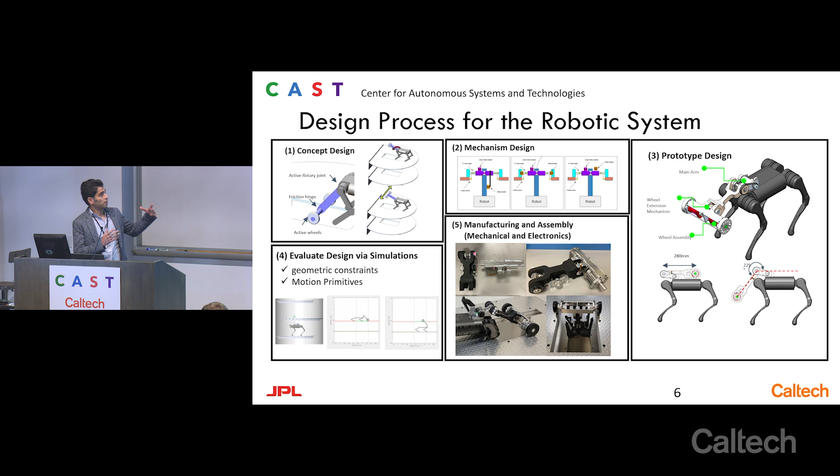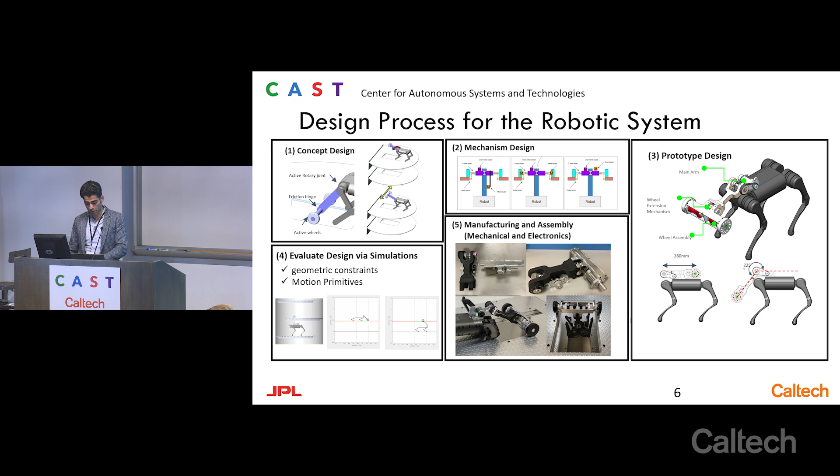It's a 4 degree of freedom robotic arm that we specifically designed for this task, which gets attached to the quadruped robot. We went through all of the different steps here, from concept design to mechanical and mechanisms design, then doing a single prototype design, going through simulations to optimize and validate this design, and then eventually fabricating and putting together all of the mechanical and electronics.

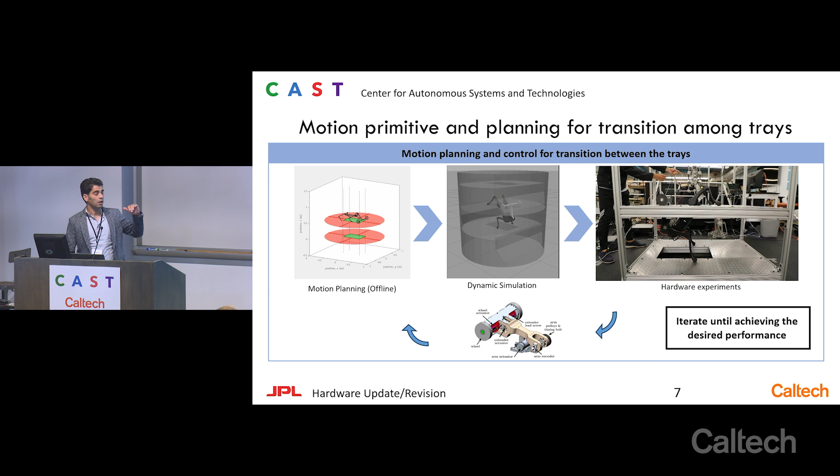After that, by doing offline motion planning and dynamic simulations, and implementing on the actual hardware and running experiments, we could optimize our motion primitives to be able to efficiently transition up and down between these trays.

Another important piece for us was our tether system, which provides power, communication, and mechanical support to the robot between the operator station and the robot. This system is decomposed into two spools: the longer spool, which goes between the tether pod and the operator station, and a shorter segment, which goes from the tether system to the robot itself.

Those are fed into our planning system, which can plan the best path for the robot to get to the inspection targets. All of these can be controlled by the operator through our graphical user interface. The commands are communicated to the robot and the low-level controller of the robot, which controls all of the motion primitives, including the transitions, walking on trays, or other behaviors that the robot can have.